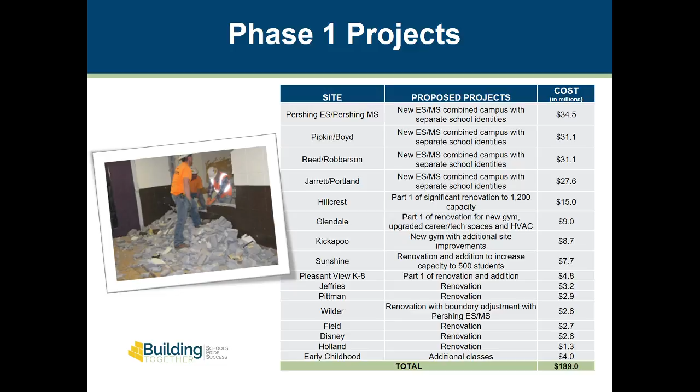This is a list of the project sites and the amount attributed to each of them, and that's also in your brochure.

Impact on taxpayers. This information is included because we've had people ask about assessed valuation and tax levies and how we relate to other districts.

So we are very blessed in this community, and you know it better than me. We have an excess of $3.4 billion in assessed valuation. To provide you context, I worked in a district previously that had half the population of Springfield Public Schools, exactly 12,500, and a fourth of the assessed valuation for local support, with hardly any commercial property at all. It's mostly a bedroom community, so more kids meant more residences, but more kids to educate.

If you have commercial property valued at an average of $500,000, that would be an annual increase of $384. The other information shows you the number of parcels within our community.

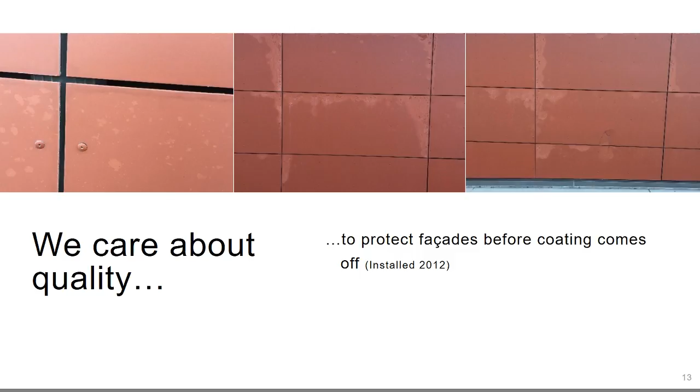This project was actually installed in 2012 in Denver, Colorado. So very new. I was just there and saw this project about 6 months ago, not even. You can see the lines here on the top left and top right, where the water just stays in it. Even if it dries out, you'll have those marks. Top left is a project I just saw in Portland. It rained that day, which is not unusual, but you can kind of see how much water a panel actually absorbs if it's not the right quality.

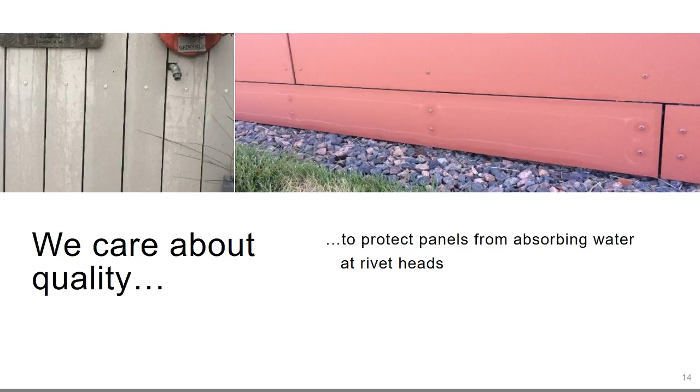Same here, we'll see subframing behind it. In the mock-up, you never see that. After half a year, you'll see a building like this. You won't have that with Swisspearl.

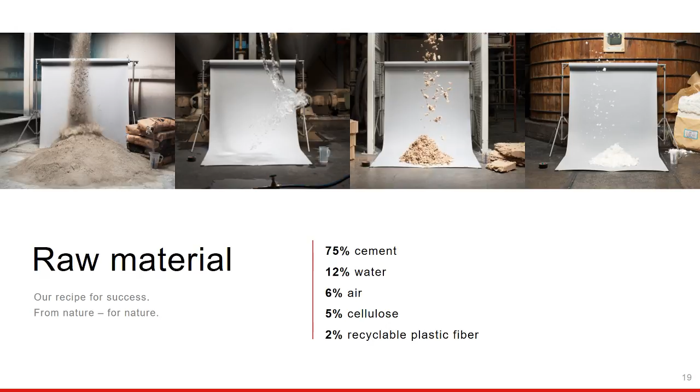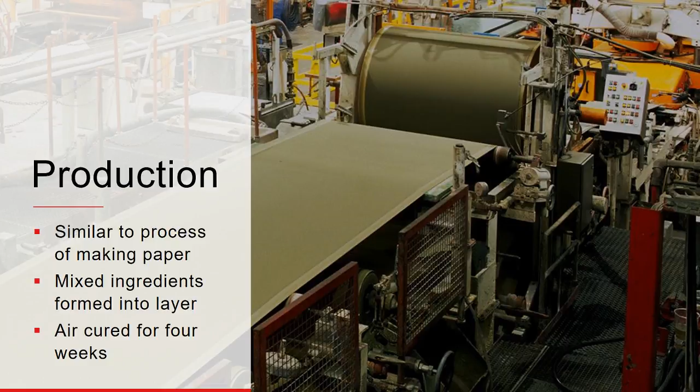Then they go on a conveyor belt, they get cut, and then they get air dried on a sheet for 28 days, which is an initial concrete curing period. Our products are always air dried. We don't put them in an oven and burn them like a brick to fasten the process, because once you do that, you get a more brittle product that will absorb more water because of the shock drying.

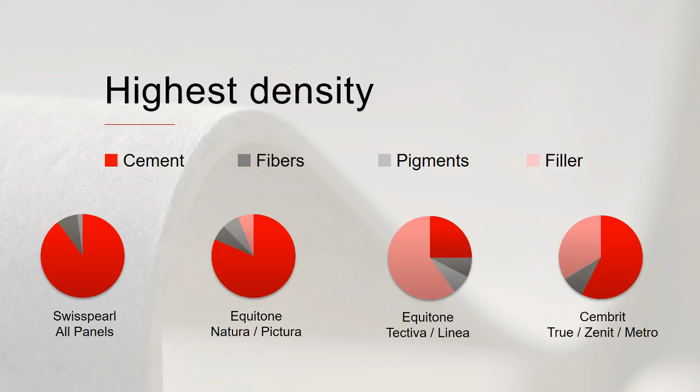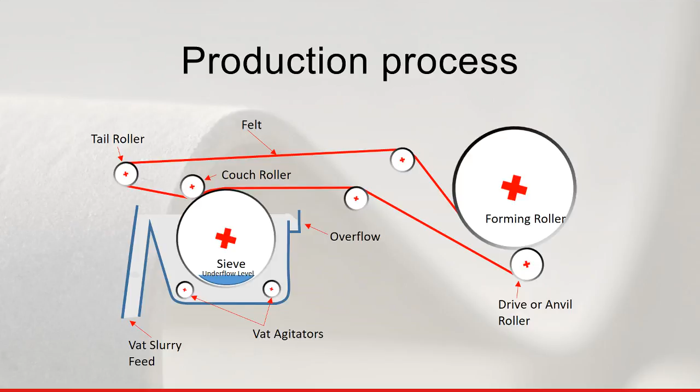Mostly what we do, almost exclusively in the North American export market, is large panels. Our panels are 4x8 or 4x10. 4x10 is the biggest size we can manufacture. And then we have different finishes, which we'll see later.

The beauty of it is you can take panel sizes, if you look here, you may have a 3 foot wide panel, and then use the 1 foot offset to get a different area, so you don't have panel waste because of our sizes. The main thing, especially for you guys as architects, is to design within that 4x8, 4x10. If you want a 3 foot 2 inch panel layout, we'll throw away 10 inches, and you have to pay for those 10 inches, which makes the price go up. If we can work with 3-in-1 or 2-in-2, that will help you tremendously with cost savings on the cladding.

All my partners in the US are more than happy to look at your layout and say, hey, if you shrink this down 2 or 3 inches, we can save you so much more on the building, because we all know we're fighting different competitions on my side, and you guys fight budgets and everything from the owners. But there are clever ways we can be more than happy to assist you.

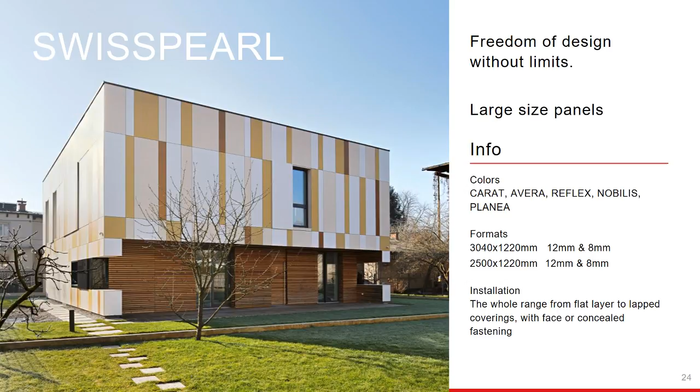We can also cut them. We have a slat form. This project is actually in Montana, and we cut a full panel and cut it in stripes. You can order it by a crate, which takes the design work out of your hands since we have the formats laid out. You buy a whole crate, it goes to the job site, drill the holes, put it on the building. Very efficient, very quick, already sort of pre-manufactured, so to speak.

We also have an overlapped one, so this I call the Pacific Northwest look, where you overlap the panel. We have two different sizes in that. They come standard, you drill the hole underneath it on site depending on your subframe layout, and then the next one goes over. I'm personally installing this style right now at my house just west of St. Louis. Very effective way.

The reason we're leaving off the holes is because in Switzerland we sell them with the holes drilled, but it's all according to Swiss subframe sizes. Then you come to the States and it's like, well, we're 16 inches on center but the holes are 12 - that didn't work out. So we sell them in just slats. Our fabricators with ADC here in Springfield can drill the holes on their CNC machine, or you can drill them on site - we provide drill bits and a screw gun. There's no special tools or anything needed to cut or drill our panels.

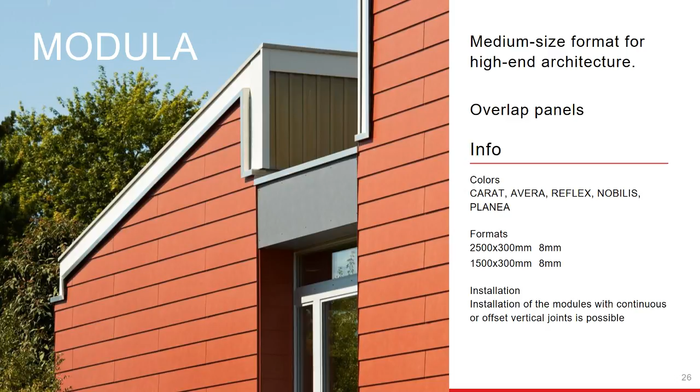And Tracy has experience with that too, so they cut quite a few of them when we built your guys' building. It'll turn out perfect. Wonderful.

We can do interior, there we have different options. Interior, you don't need to go face fasten, you can actually use an adhesive. In theory, you can use it on the outside as well, but the issue is no adhesive manufacturer, European or US, will give you a warranty, because of different climate changes - they just don't know how long it's going to hold up. If you're doing it in a warehouse where it's controlled, there might be a chance. That's why outside we say it's face fastened, or we have a concealed system I'll explain later. But on the interior it's a whole different scenario, because we don't have all the weather, heat and cold issues, and the full range can be used.

We also can go on the roof. This building here has the same large size panel that goes on the roof. They can be lapped, or they can be open joint rain screens, kind of like on the facade, brought onto the roof. All you have to do is get the water behind it in an almost concealed guttering system. I'm installing a roof at my house similar to this, but they're actually lapped, big 4x8 sheets lapped on the whole house. My wife didn't really have a choice of selecting cladding or roofing material, so that kind of took that out of her hands. And the floor, by the way, too.

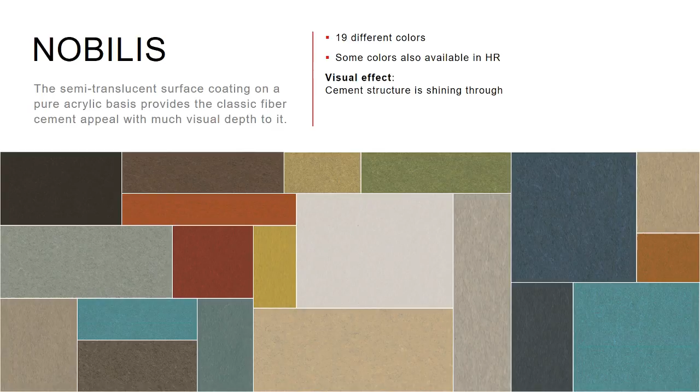We have a main line that is just a gray core, so it's not colored through, and then it has a surface coating that's translucent. That's a little bit cheaper from a price point because there is no color pigment in the panel itself. So it's a gray base sheet, Portland cement gray, and then a translucent coating or a fully opaque coating where we can do very, very bright colors with it.

All our colors, the most colors being the CARAT line I showed first, are all the same price. Doesn't matter if you have yellow, black, green, or red. The ones on the gray core are about 15% cheaper, and the reflex and the Avera are a little bit more expensive because of the color pigments and the technology. But we're talking within, I'd say, a 5 to 15% range of pricing of our main line.

So even on the design phase, there's a lot of things we can be very active and work with you to keep a very even playing field for your building, but we'll have so many options to make the building more interesting than just having a plain Jane white metal panel, for example. Sorry for the guys that have metal panels.

Custom colors are very popular, mostly used for accent pieces. Bring me a color swatch from whatever you have, and within 10 days we have a physical sample on our fiber cement in your office. All I need to know is if you want a solid finish or a translucent finish, and whether you want a colored through or a gray core, and we'll color it out and ship it to you.

I've done numerous jobs. I'm working on a big hotel in Chicago right now where they brought me literally a piece of jeans, and I said, okay, well, I need a little bit more than a piece of jeans. So they found their blue at Home Depot that they wanted, shipped it to me, we matched it, and DLR, the architect, is as happy as it's going to get. So we'd be more than happy to do that, and there's no upcharge for you guys to make custom colors.

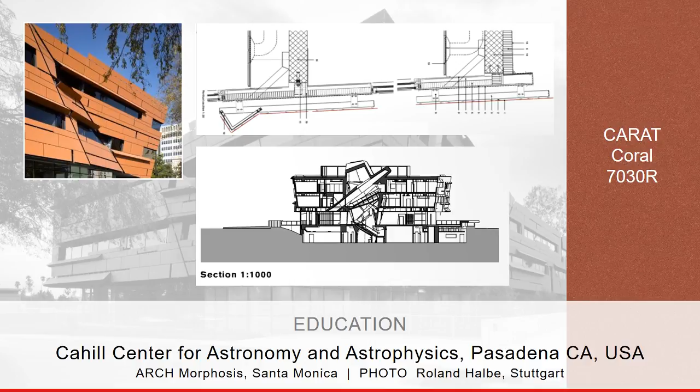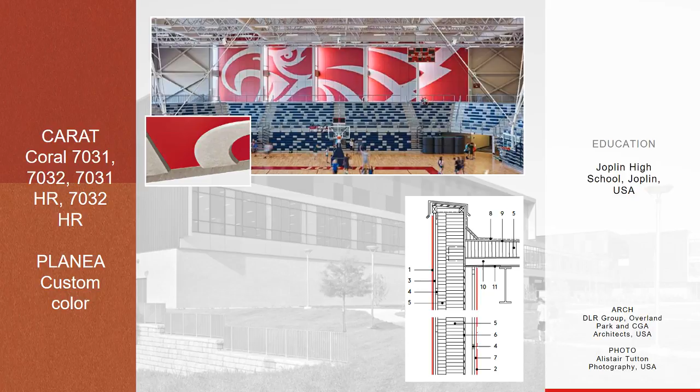On that project, Joplin High School, the eagle is on the inside of those louvers, and on the outside we have Swiss Pearl. Everything that's red is Swiss Pearl, the gray is metal and corrugated panels. Very large job. Here you can see the perforations we cut out, a couple of custom colors, and the eagle on the inside of the gym wall.

Again, what we can do with cutouts off the panel to do perforations, to show a corporate logo and incorporate that into the facade.

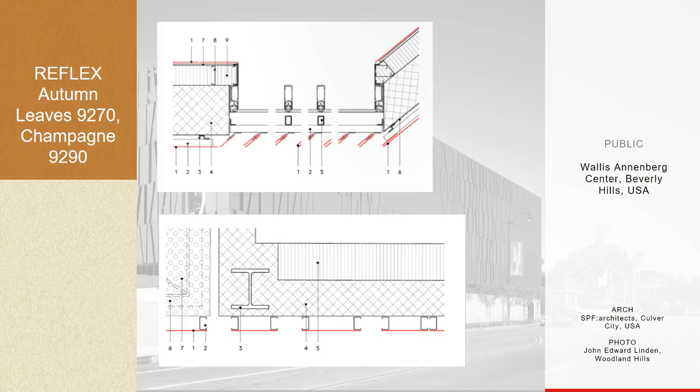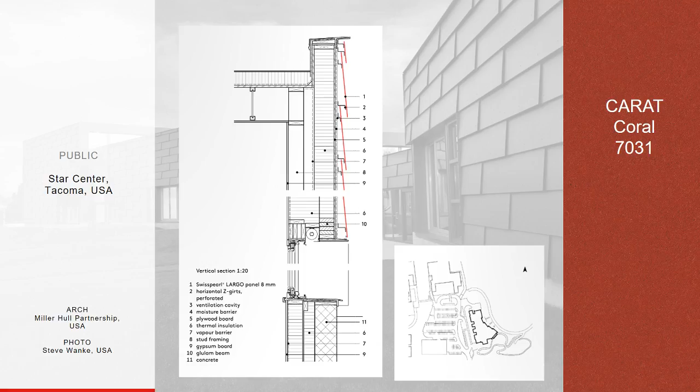Now I'm just going to touch briefly on what we can do with our garden line. Flower pots, from square to round, custom designs, sizes, standard colors, special colors. We can do pretty much anything.

We have furniture lines, wine racks. It's endless. They're not the cheapest, so you're probably never going to find them at Walmart or Home Depot, but it's truly unique.

If you ever go to ADC's showroom, they have a couple of the flower pots there, some chairs too. At our big AIA show in Orlando this year, you'll see some flower pots and furniture as well.

Go one back. Yeah, so that's, oops, go the wrong way here. Apologize. So, George Davis and Associates.

Maddie can maybe speak a few things. They're my distributors for a number of years now with the Swisspearl line, but they also have other lines.

So, Maddie? Yeah, I'm Maddie. I'm speaking on George's behalf. He couldn't make it, but we're out of Kansas City. We cover Nebraska, Iowa, and then St. Louis and Springfield, obviously Kansas City.

But we have about 20 lines or so, both interior and exterior. I handle most of the interior products, while he handles the exterior. He has Swisspearl, Millennium Forms, which they'll talk about up there, and then Jardin Zinc. We also do Bendheim clipped glass, rain screen, and their channel glass.